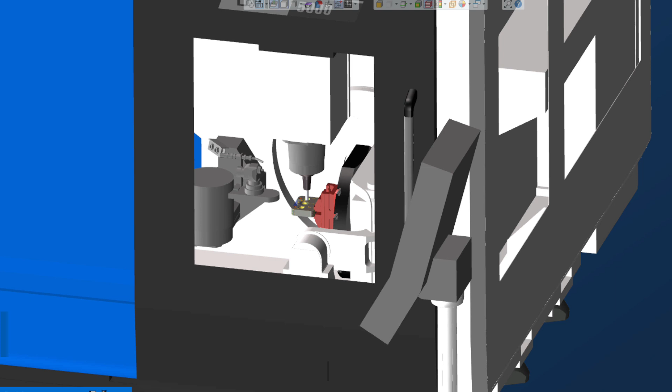In this Tech Tip, we're going to talk about something called Combine Shapes. This allows us to add, subtract, find the intersection of geometries, whether you read them in or create them inside of GibbsCAM. Also allows you to trim lines inside, outside of your geometry. With that, let us begin.

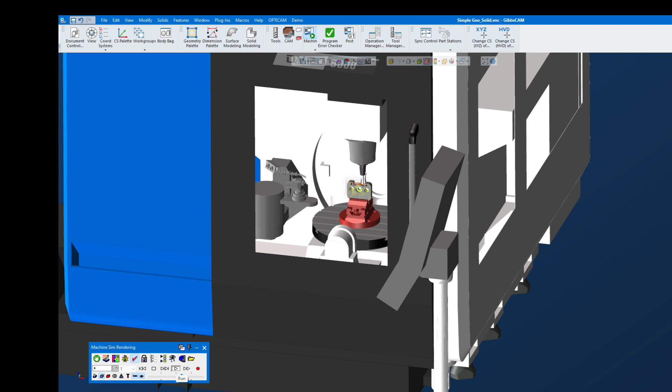So we're going to show you the first function here is called Combine Shapes. So we're going to go to the Geometry palette. We're going to go to our Shapes. And at the end here, you're going to see Combine Shapes. This allows me to add, subtract, or find the intersection of geometry. I can trim geometry to another shape for the inside, for example, which we'll show you. I can trim geometry to the outside of a shape or on both sides of the shape. Okay, and we'll show you that really quick.

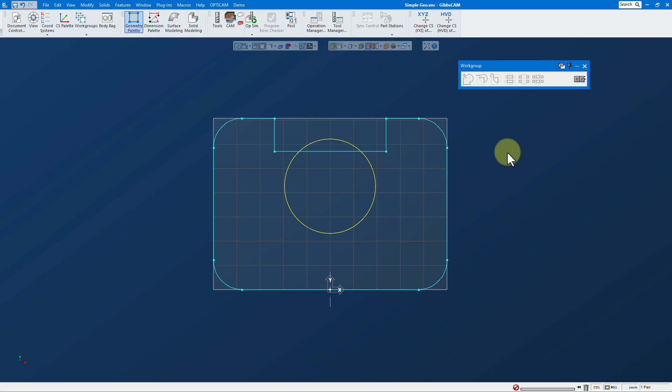Next thing I want to do is add the circle. So let's double click here, the circle, and we'll say add. And just like that, we've created our shape out of 3 pieces of geometry. Now you could use this if you received some geometry from someone and you need to add something to it. You can do the same thing. You can draw some geometry and add it very, very quickly.

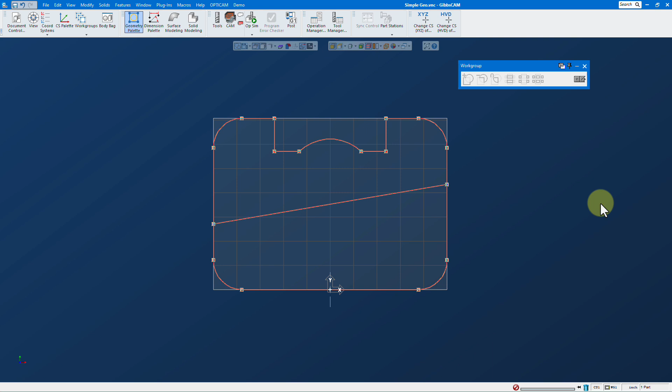I'm just going to sketch a line here. And we're going to go back to our shapes. And what I want to do is I want to trim the inside of this line to this shape. Okay? So we'll pick the shape, we'll pick the line, and I will say trim in. So it trims the geometry to the inside of that shape. This one says trim out, so it trims out the center and leaves the outsides.

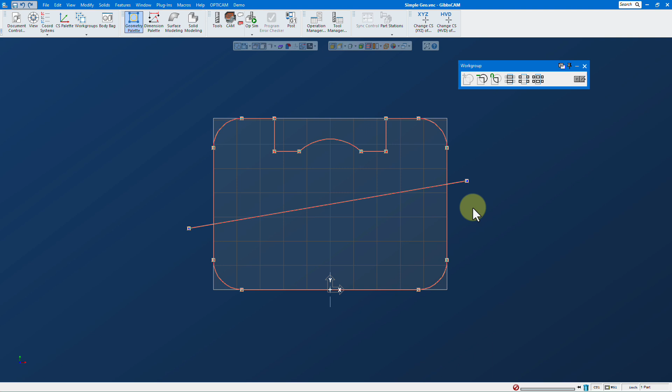The last function here says slice, and what this does is it gives us all 3 pieces. So it basically slices and gives you the 3 pieces of geometry that you might want. Okay? So again, it's really nice functionality, quick, easy, no trimming, untrimming, manipulating of the points, none of that stuff. 1, 2, 3, and it's done.